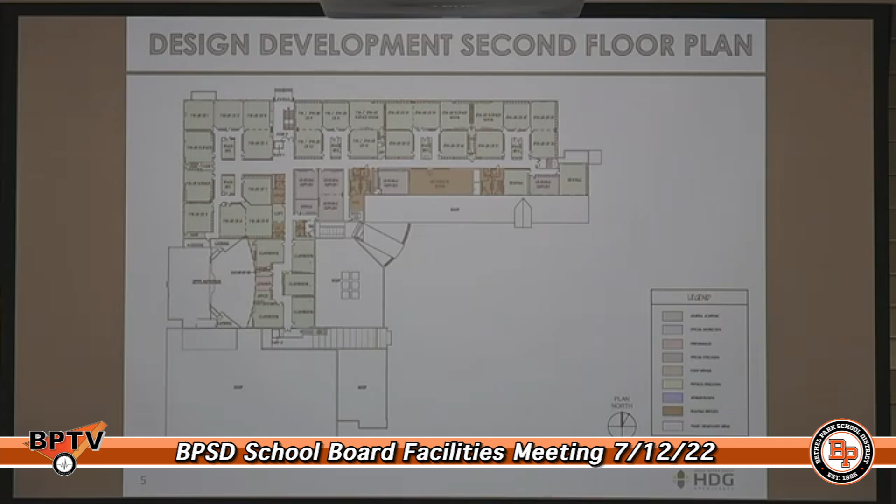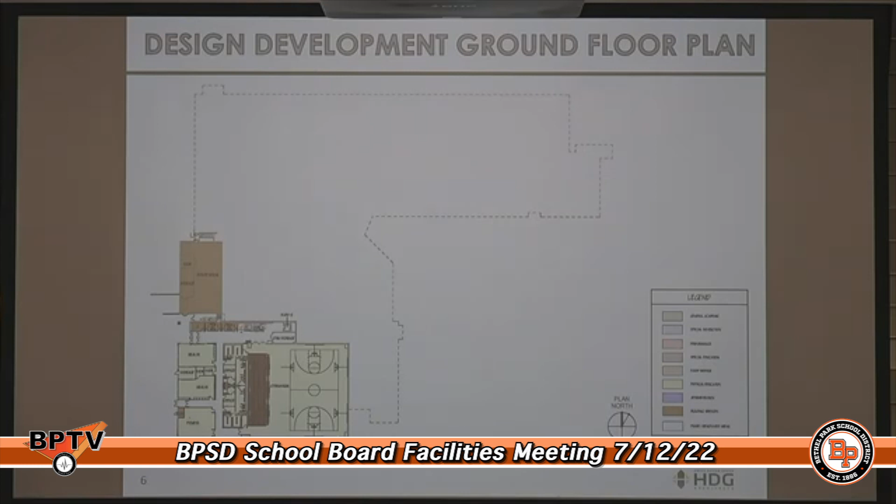Any questions on the overall floor plan?

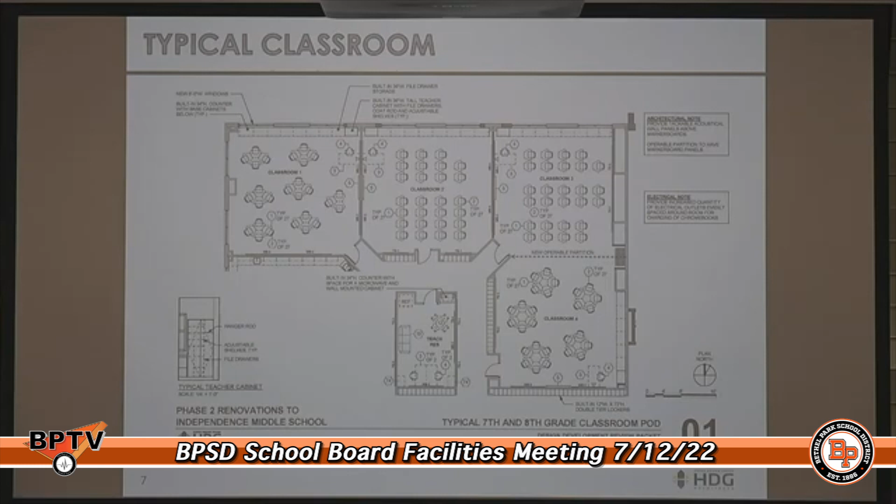So this is a typical classroom layout. The next page in here is a specialty space - this is the sewing and nutrition lab, which is a very specialized space that we had to walk through very carefully with them, making sure they understood what we're wanting to do here.

Each board member will be able to see more detail in the complete design development packet, but a lot of detail was discussed. You can see there's architectural notes, electrical notes, plumbing notes, HVAC notes, equipment notes, layout notes, etc. All of that information has been incorporated into these drawings, developed for the architectural, structural, mechanical, electrical, plumbing, and IT drawings done for the project. This is just the design development packet, and these will in turn be developed further into the construction documents used to get the bids for the project.

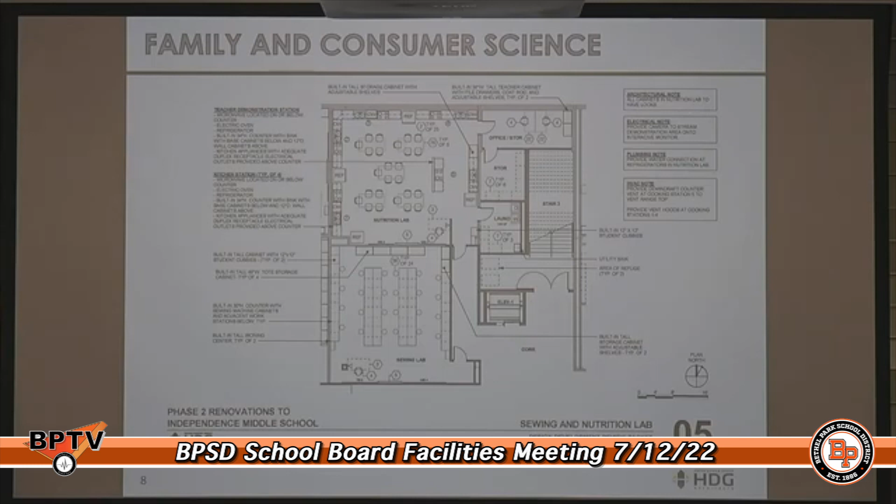So those were just a couple examples of what's in that packet. Do you guys have any overall questions about the process of meeting with the teachers or the layouts before I show you a couple renderings?

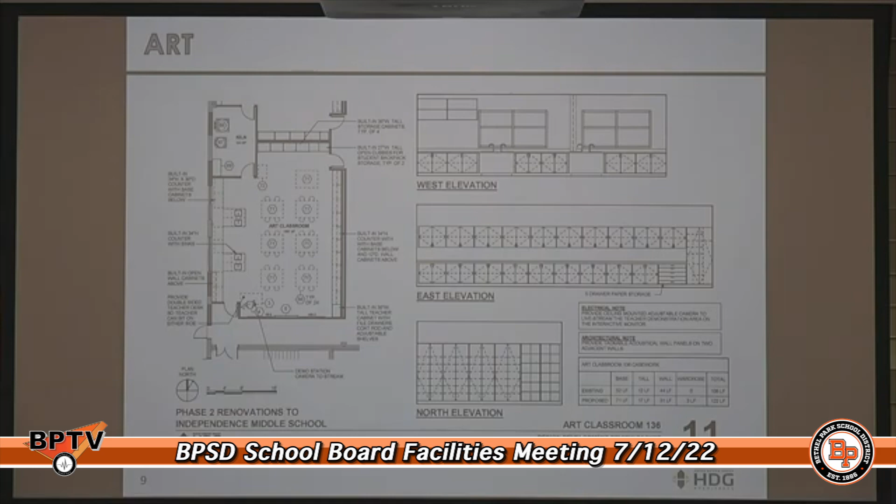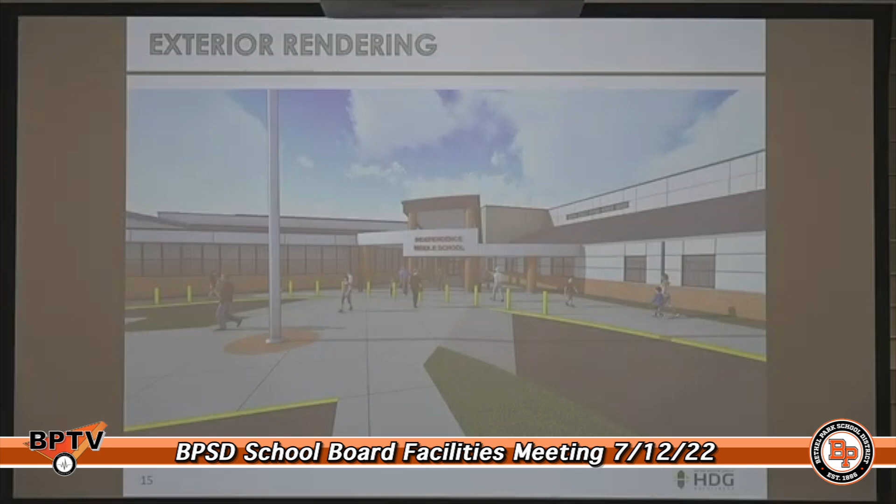And as Kevin mentioned earlier, everything we kind of went through here was put into, I don't know, 200 to 250 drawings that we handed over to SiteLogic to put together a design development estimate that will continue to be evolved and turned into construction documents, probably more sheets than that.

Any other questions from the board on the Phase 2 design?

Okay, so SiteLogic, do you have an update on the current construction project going on?

So as far as phase 1 goes, that's what we'll start with for today. Let's pull this up real quick.

So to start, we've got a phasing plan that you can actually take a look at this time around. This should help visualize what we've previously discussed in past updates.

So to begin, I'll start with the dark orange portion on the bottom left-hand side of the page. That is phase 1A that we've previously mentioned, which we consider the administration area. That'll be the first area we're turning over, as previously discussed, set for August 17th.

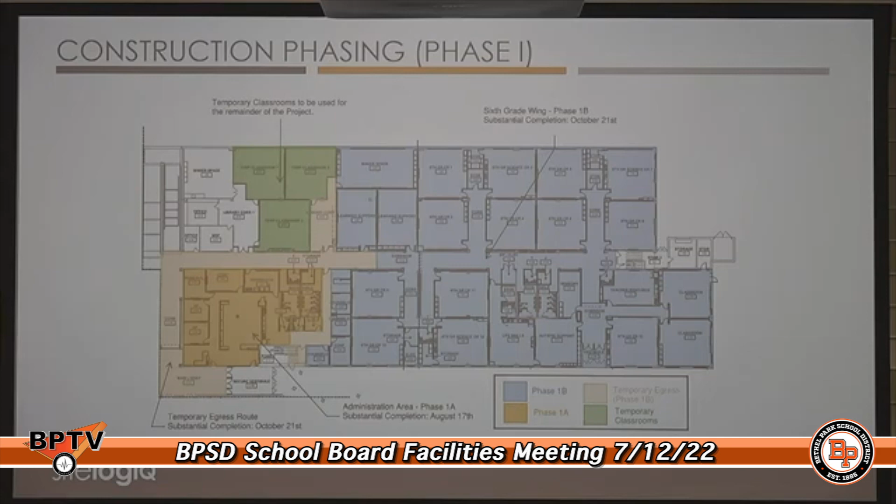Any questions as far as the phasing goes? The general layout of the areas we've been working on thus far on the project?

So this is just a summary of the ongoing activities, which I just touched on. We're doing framing. Similar to past updates, because of how it's phased, we're doing a little bit of everything at this point in time: framing, MEP rough-in, drywall install, drywall finishing. We're preparing for MEP trim finishes, and the architectural aesthetics that'll pull those spaces together.

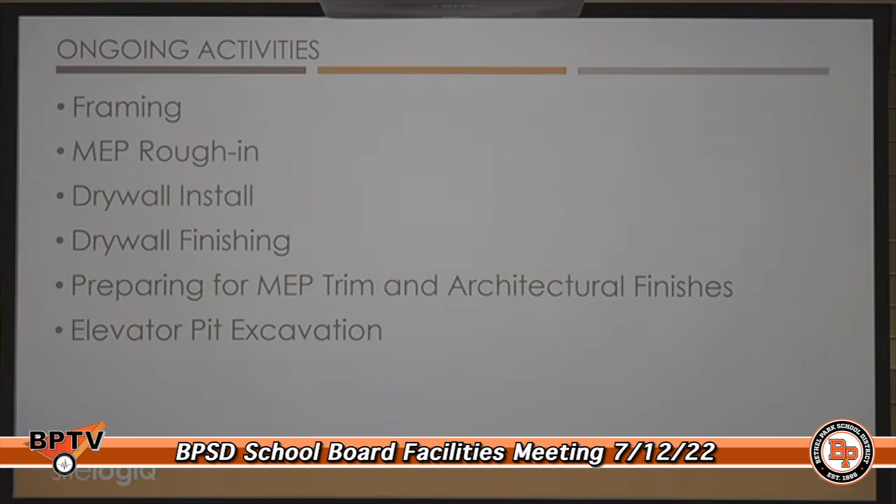Something I did not note, it wasn't on the last diagram: we're also working in the elevator pit. The new elevator we'll be installing is next to the cafeteria, and that'll be ready October 21st as well. That's an area where there's going to be a lot of traffic, so we'll have temporary measures put in place to make sure the area is safe, secure, and separate from student activities.

As far as construction challenges go, long lead times have been an issue we've been navigating throughout the course of the project. I've got a couple industry items we've been struggling with across the board on all projects.

Doors and hardware are two major ones. Those are items that, when we started this project with the help of Hayes, we were able to expedite, get approved, and really get a jump on the lead times associated with them.

Transformers and electrical panels are another item currently taking a very long time to produce. People are struggling because individual components that are part of that supply chain process are taking a very long time to procure. That was another item we tried to expedite and get ahead of, and even then we ran into issues as we worked through the project.

It changes day to day. You think everything's lined up and good, then you get a call or email from your manufacturer telling you it's been pushed six weeks, eight weeks. So that's something we've worked through by finding substitutes the engineers have approved, or using relationships throughout the industry where people help us out and jump us in manufacturing lines. Those are some of the ways we've gotten around these supply chain issues and long lead times.

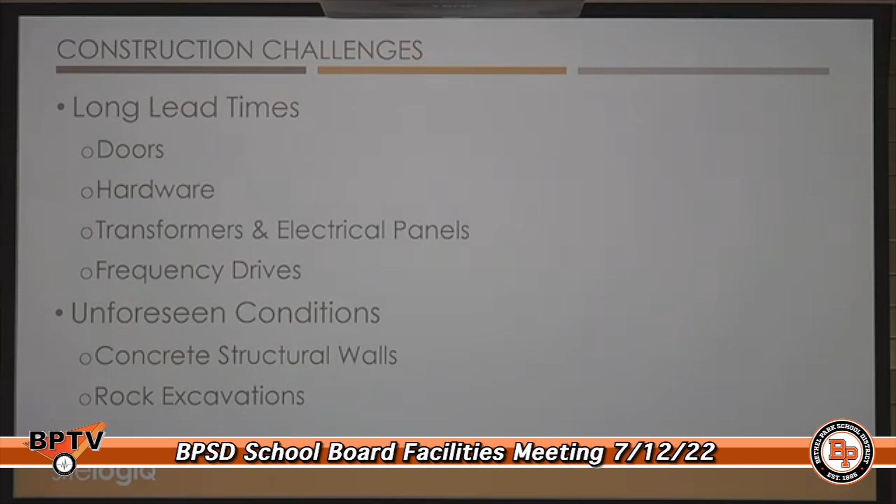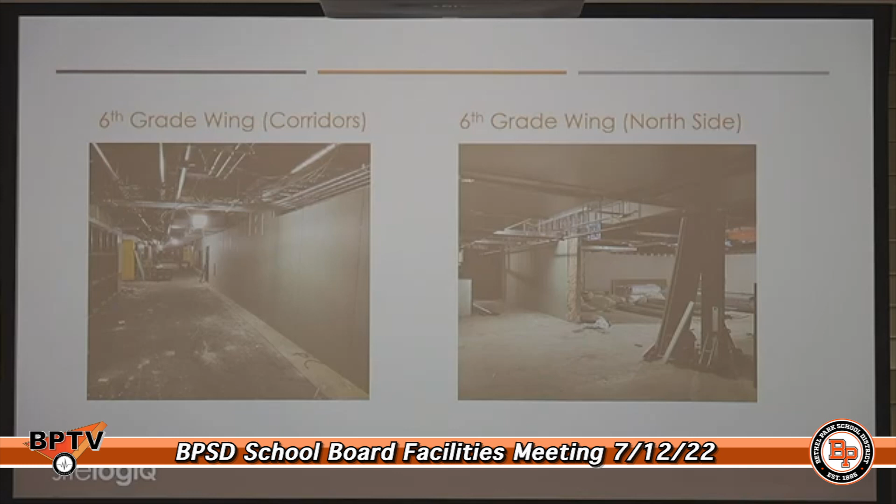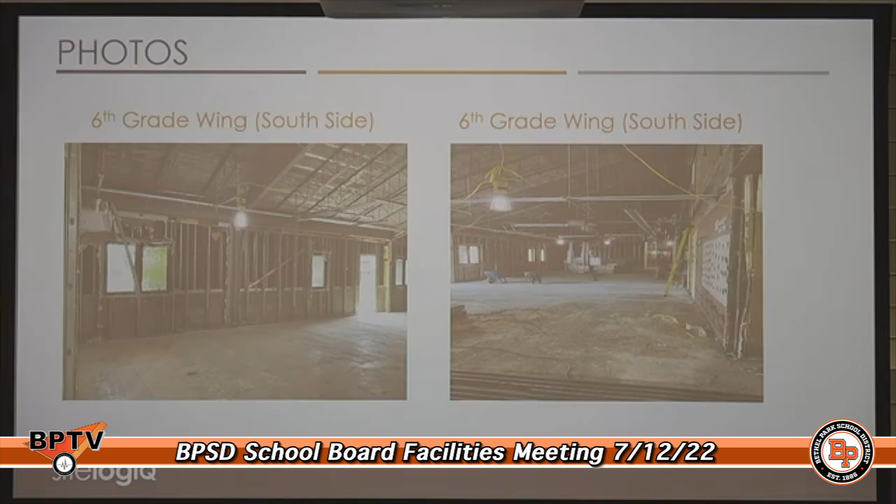Any other questions on the Phase 1 update?

Let's see, is Mike Arnold on? Yeah Shane, can you hear me okay? Yep, yeah, we got you. Great, yeah, good evening everyone.

This is Mike Arnold with SiteLogIQ, program executive for the project, and also online tonight is Tim Werner, who serves as our chief estimator. Just wanted to give an update as it relates to our work as Phase 2 continues. Obviously you heard from the Hayes Group here earlier, and I guess wanted to do a refresh as it relates to the overall budget.

As we've discussed before, we have the Phase 1 actual cost of a little over 12.7 million, and then the soft costs of a little over 5 million, which basically left a balance of a bit over 24 million to get us to our roughly $42 million budget that we are working towards.

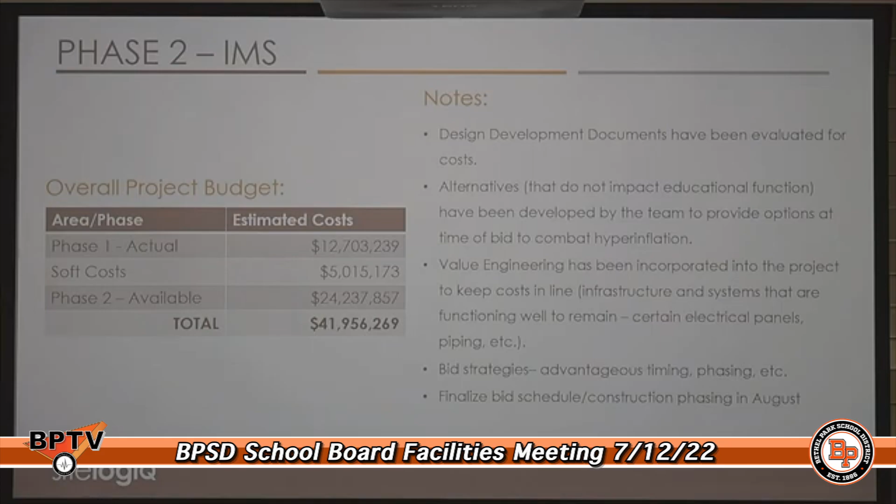Next on the agenda, Draw Collective. Are you going to give us a short update on the elementary center?

Thank you, thank you, thank you folks. Sorry, probably not worth me even sitting down. Mine's going to be much briefer than what you just sat through. Is this on? Can you tell if this is on? Okay, thank you.

So I'm really not making a presentation tonight, just giving you a verbal update as to what's been going on. We've talked about the phases of the project, and we're still at a very high level. We've been focusing on the programming and planning for the building. We've met with the administration, done a lot of diagramming back at the office, and we're actually meeting with principals and some of the specialist administrators this week to really start to talk about how we test all of those program functions within the building.